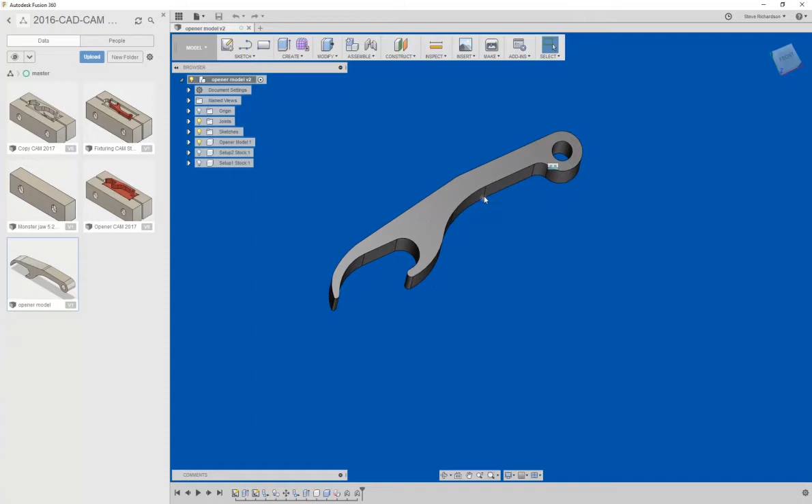The main point is that this inner radius can be made with a 1/4 inch end mill, and it's not a pure slot - it's a little bit bigger than a 1/4 inch. But there are a couple caveats we're going to get into when I show you my CAM. Basically if you do roughing with an adaptive clear, you can't leave too much stock because this isn't very much larger than a 1/4 inch. I'll show you that in a few minutes.

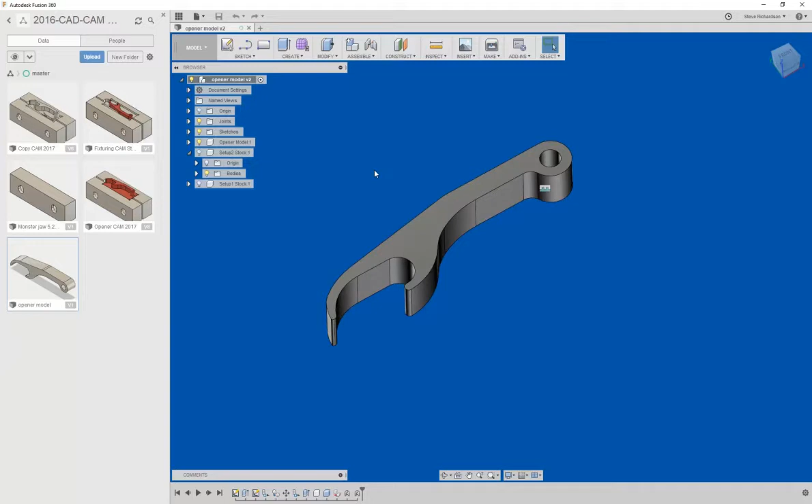This model takes advantage of some of the stuff we talked about in homework one, where I defined the stocks based on the model, rather than just using boxes defined in the CAM. We actually draw out the stock, or model it rather, in the modeling section, and then use those as stock definitions.

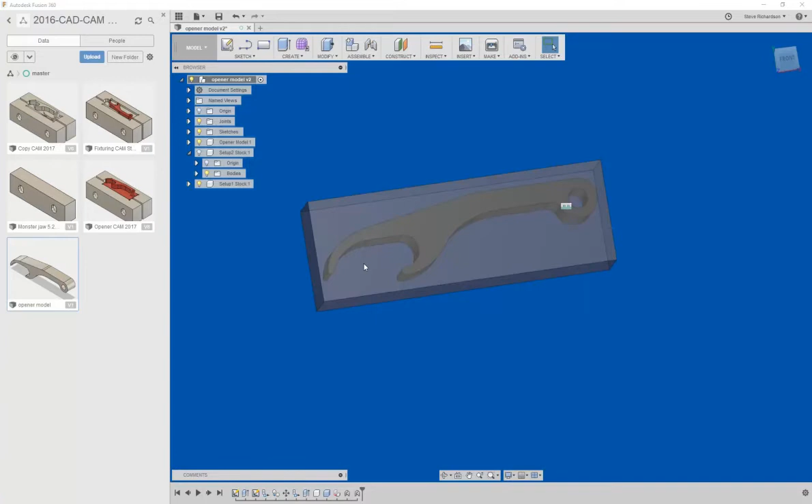For setup one, the stock is just a chunk of aluminum, a rectangle or box. That was easy to define, and I've got that predefined in this model for you so you don't have to go through that exercise. The opener is embedded inside the block, basically biased towards the top. This section at the bottom, this margin, is basically what's going to be held by the soft jaws.

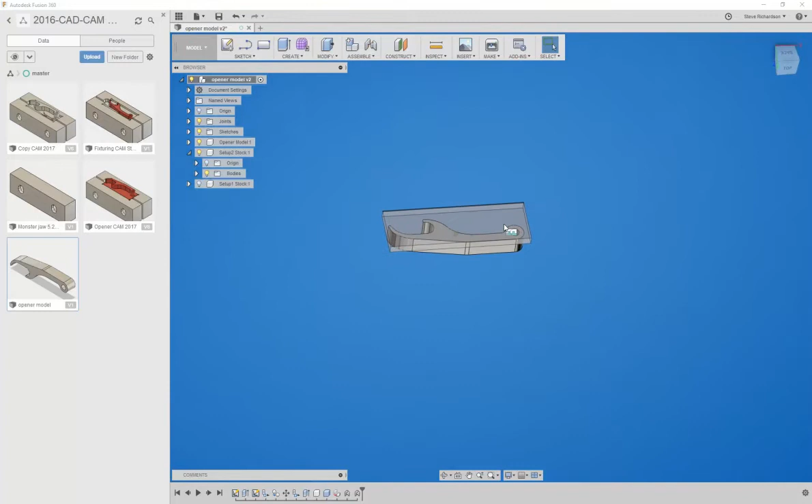When we flip the part over - this is really the one that's not possible to model just using the basic stock definitions in CAM - this is basically the bottle opener flipped over with that extra material represented on the back. This is exactly what it will look like as we go into setup 2 after we've taken it out of the vise from setup 1.

It's a little bit annoying to have to manage these two copies basically of the model, and you'll see that as we get into the CAM a little bit. It's a little bit frustrating. There's probably a better way to do it, but this is the way I've found so far that works.

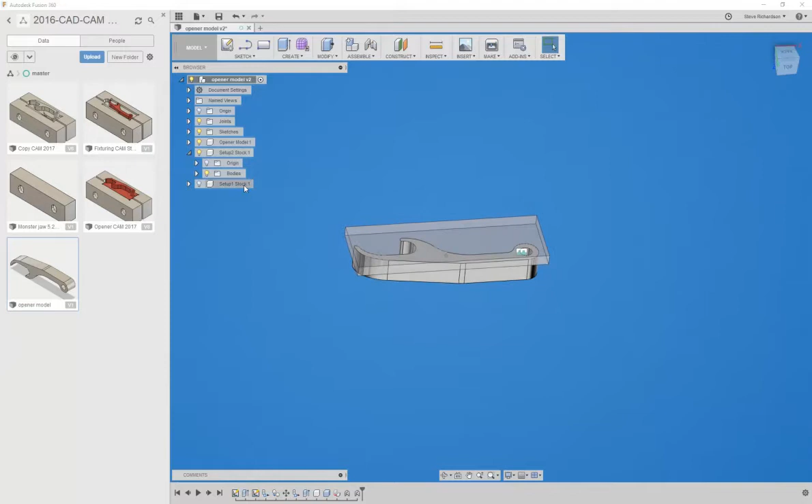So you could open this up and take a look at it, but this model is linked into the file that we use for CAM. You don't really need to work directly with the model itself, so I'm going to close that out for now and not save any of the changes I just made.

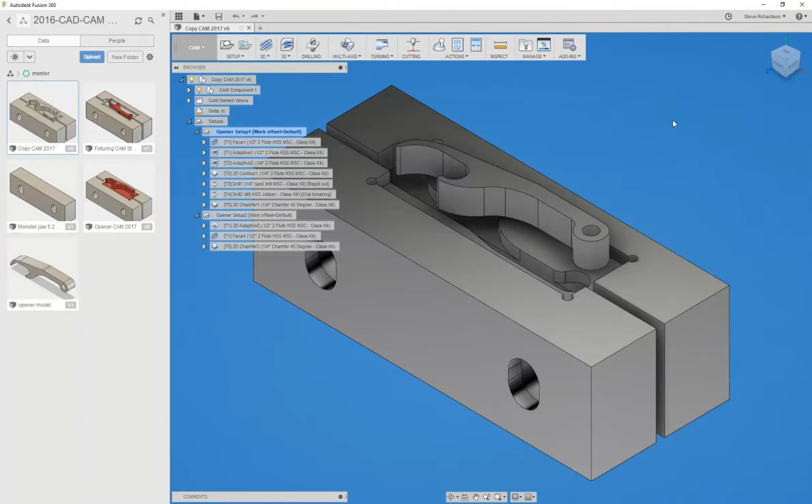So like I said before, I copied over that file that I provided into a secondary file, and this is the file I'm actually using to do all of my CAM work. You can see I've already got this all completed here. This is actually the CAM that was used for the in-class demo I did Monday night. The first thing to take a look at - we're in CAM mode, obviously.

It's very important to open up the model where this component is defined, and this is something you're going to have to do constantly as you work on this, going between setup 1 and setup 2 - enabling and disabling the two different models, because it's basically just two copies of that opener model imported into it, and flipping them on and off is necessary.

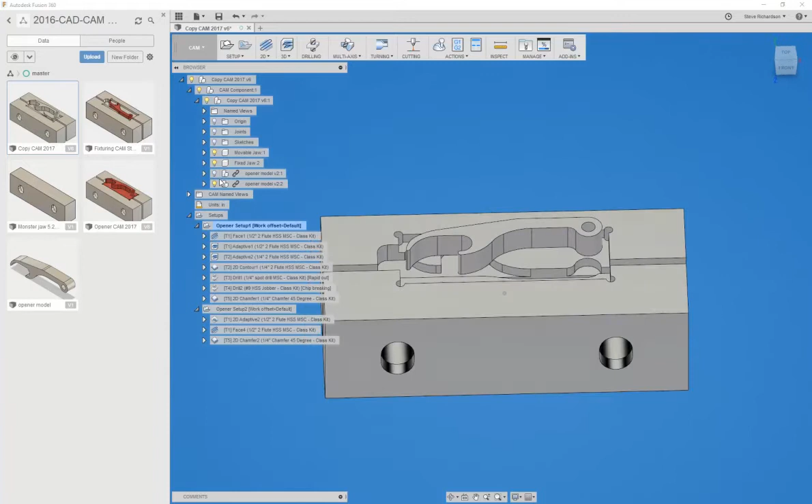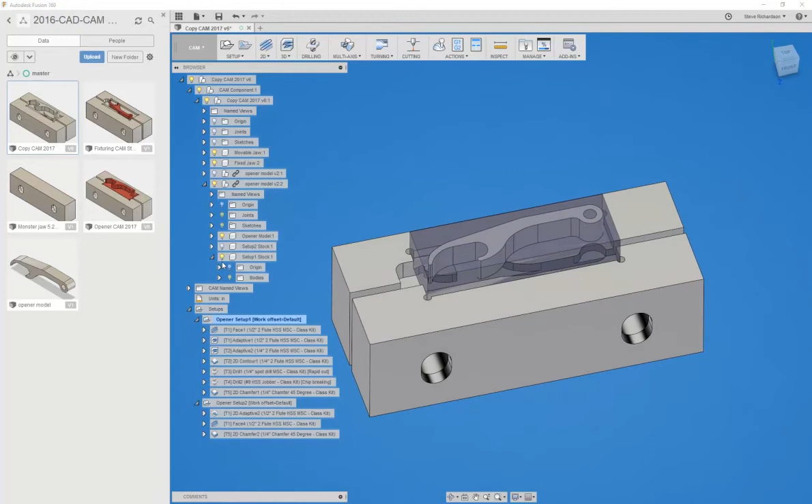You can even expand these further and turn on the definitions for the stock within each one. One thing to note - it's showing up transparent here. I actually modified my opener model from the distributed version, and all I did was turn on opacity to 50% on the stock model for each one. It makes it a little easier to see in certain cases, but we don't necessarily have to have that turned on.

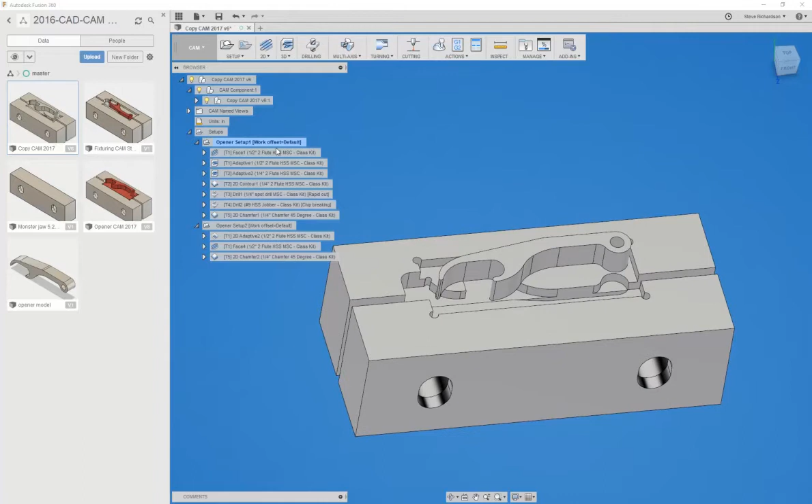So what I want to do is just show you, as you import this thing, the way I distributed it, the setups were all defined. There was a setup 1 that was defined and a setup 2 that was defined. Your job from that point was basically just to program in the operations.

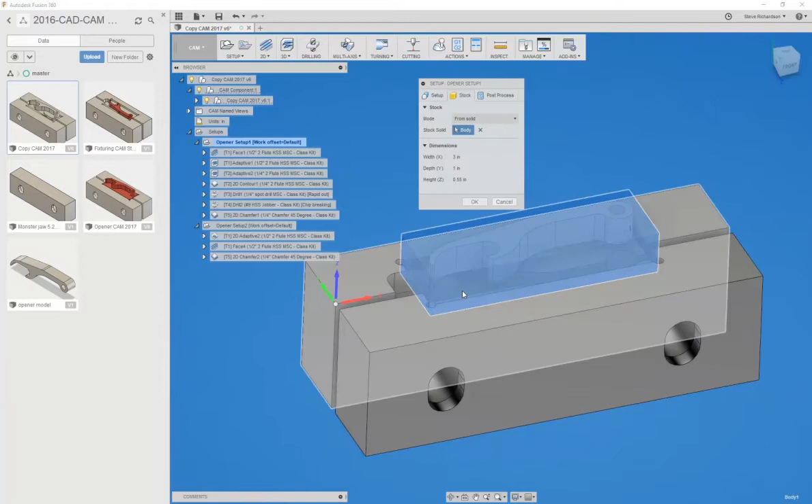But I wanted to give you a little background on how those setups are done. For setup 1, obviously we're starting off with that chunk of aluminum. That stock is defined as a body, and that body was defined in the CAD, and it was the upright version of the model, or the initial copy of the model with the part in this orientation, and it was just pointing at the stock definition that was the box in that copy of the model. It's a little bit confusing, I know.

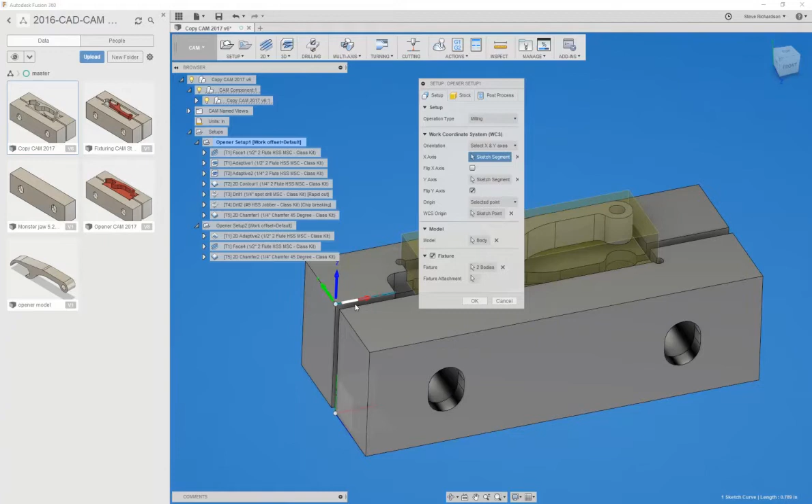The work coordinate system for both setup 1 and setup 2 is this corner. This rear jaw here is the fixed jaw in the vise, and for both of these we're using this corner. So we're going to touch off on this face, and we're going to touch off, it's a little hard to see it here, we're going to touch off on that face, and then we're going to touch off on the top of that. The nice thing is that both setups use the same work coordinate system origin, so we don't have to retouch off when we flip the part over. That's one of the benefits of this work holding setup that I defined, just to make it a little quicker to run the part in class.

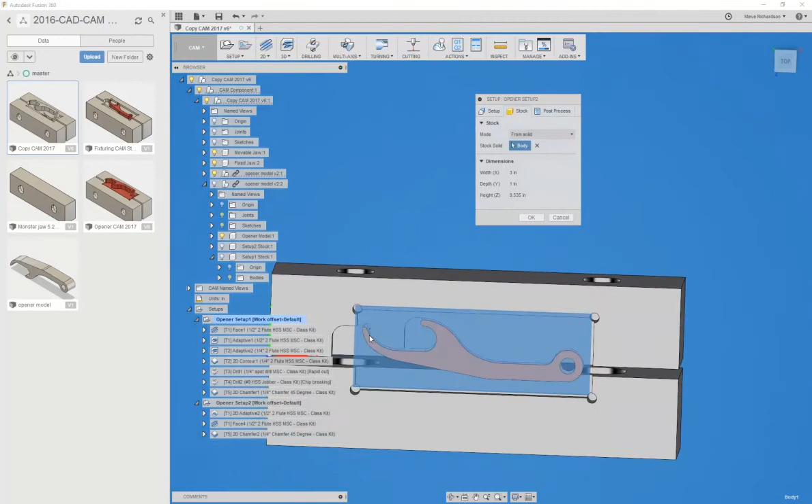So that was setup 1. Setup 2 is defined also in this model. This is where we get into the point where we need to flip these things around. This uses the flipped version of the part, and it uses the setup 2 stock that was defined. So this is exactly what it will look like. It'll be held in the soft jaws, and we'll have this remaining material on the top that we're getting rid of. That's really the whole point of setup 2 in this particular job.

Oh yeah, I wanted to also show the work coordinate system for setup 2. Again, it's that same point.

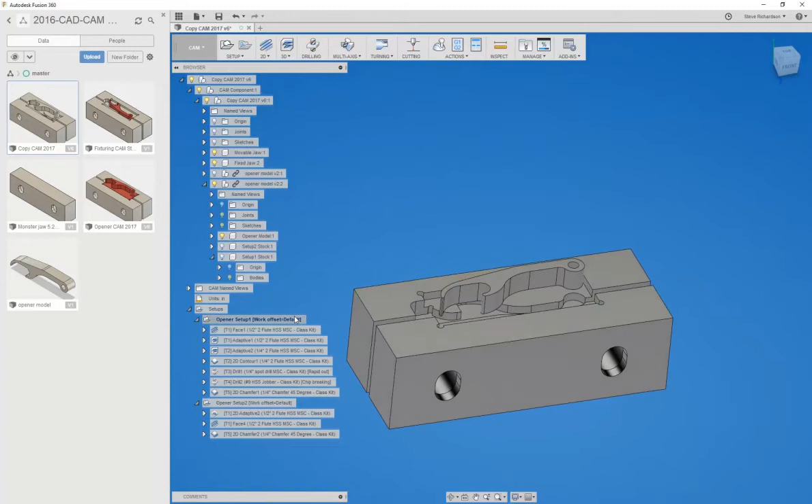Before we get into the actual operations that I have programmed here, I wanted to show the tools that I have set up. This was the homework, I think, in the second week, just asking you to set these tools up. Should have 5 tools. They need to be numbered in this order because I really want everyone going through this in the same way so that I can more easily sanity check people. There's not necessarily any reason you couldn't number them differently, but for the sake of consistency in the class, I want them all numbered this way.

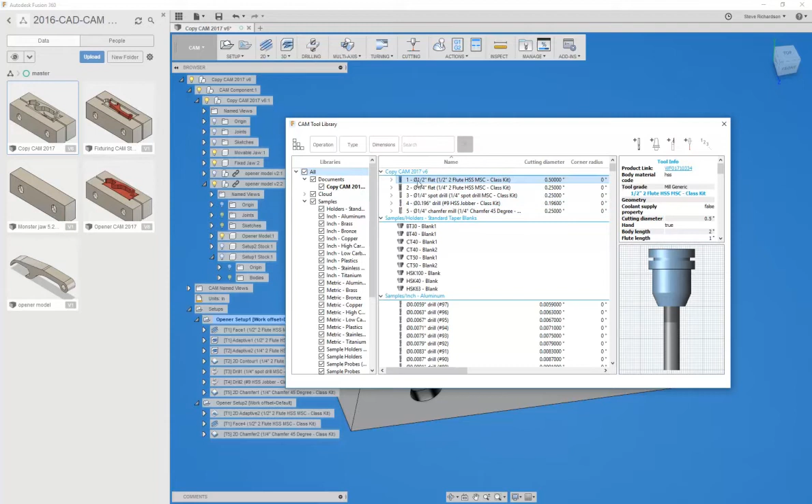So tool 1 is that 1/2-inch flat end mill. I actually defined mine with a bit more detail than you guys necessarily have the info for. This shows where they came from, what the model numbers are. Got the actual flute lengths and shoulder lengths and everything programmed in here. If you really want to match this, you can. I'll probably provide this document shortly.

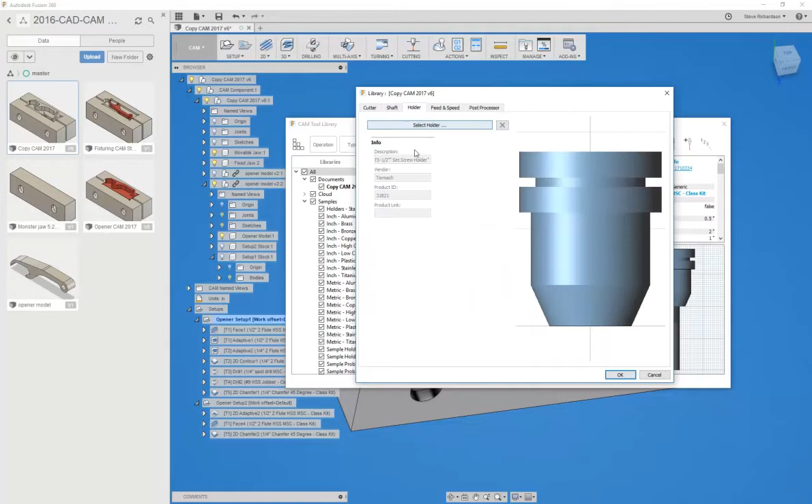I defined the tool holder as a Tormach set screw holder. I did rough in some feeds and speeds. It's a little conservative. I just set in 4 thou per tooth and 4,800 RPM just as a rough starting point. And in the post processor tab, the most important thing is make sure that this was set up as tool 1.

This is a common dialogue you're going to get if you make changes to your library, that it says, hey, all these operations use this tool. Do you want to update them with the settings that are in this tool definition? This gets you in trouble all the time because it defaults to yes. You really don't want to make any changes here, so generally you want to say no. If you have speeds and feeds programmed that are different for each of the operations that use this tool, it will basically go and blow those away and replace them with what's in the tool library. That's a trap that I have gotten into before, and I see a lot of people accidentally just say yes right through that. So you're going to want to say no to that.

Just quickly go through the rest of the tools here. Tool 2 is a 1/4-inch end mill. This also has the MSC info where the tools come from, the shaft diameters, the lengths, all that stuff. This tool happens to have a larger shank than the actual cutter.

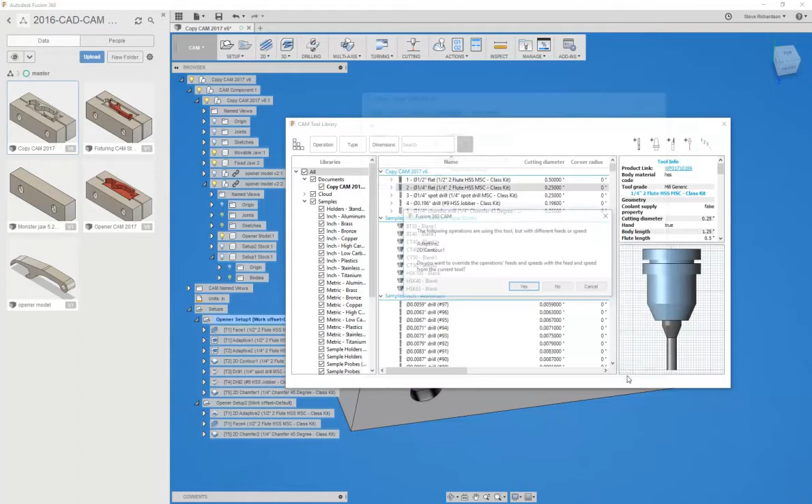Just happens to be the tool that I purchased for the class, so you can actually match that definition if you want. It actually required using the more detailed tool editor to get that set up. This is also in a set screw holder. I just did an initial 2 thou per tooth, 5,000 RPM, just as a rough starting point. And the post-processor page, you've got to get all these numbers set up for tool 2. Again, we don't really want to change that, just cancel out of it. It's fine, I'm not really editing here.

Tool 3 is that 1/4-inch spot drill, high-speed steel. This is all the info, again, from MSC where the tool came from, cutter diameters. It's going to be held in a TTS ER20 collet holder. Feeds and speeds - it's really the vertical feed rates that matter in this one. I just have it roughed in at 3,000 and 3,500 RPM.

Post-processor, make sure it's set up for tool 3. Tool 4 is the number 9 drill. There's the info for that. The holder - we have only one drill chuck set up in the default Tormach tool library. We actually have some different chucks at MakeIt Labs, but it's fine to define it as this for now. Speed and feed, the vertical is what matters again for drilling. I've got it set for 4 thou feed per revolution. Post-processor, again, make sure this is set up as tool 4.

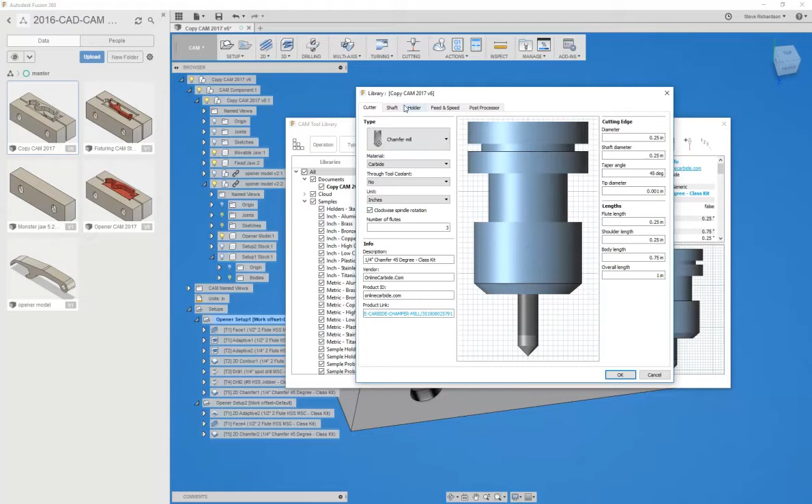The 5th tool is the 1/4-inch chamfer. The only real trick on this one is that if you define it as a chamfer mill, it needs to have a diameter at the tip. This one I think I bought for the class actually does have a slight flat on the tip, so I just define it as 1 thou at the end. Taper angle is 45 degrees, and we're going to hold that in an ER20 collet holder. Speed and feed, I've got it set just under 1 thou per tooth and 5120 RPM max RPM.

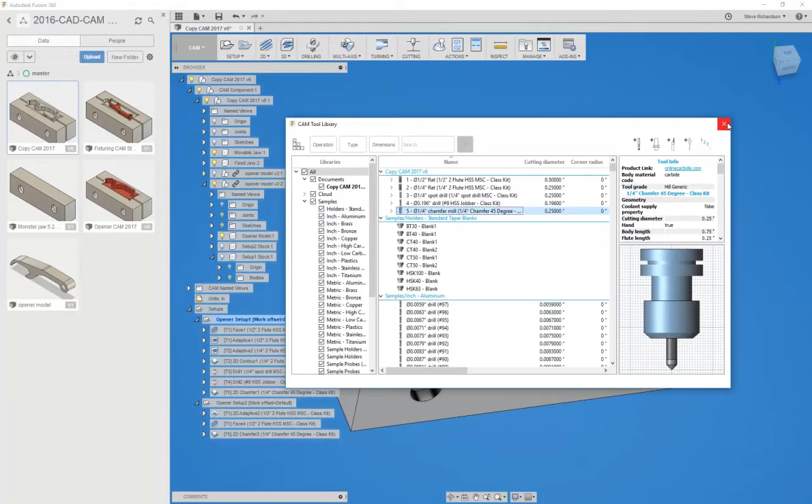Post-processor, just make sure it's set up as tool 5. So you should have your tools basically set up in a similar fashion. It doesn't have to have every last field filled in the exact same way that I did, but they need to be close to that. I'm going to cancel out here.

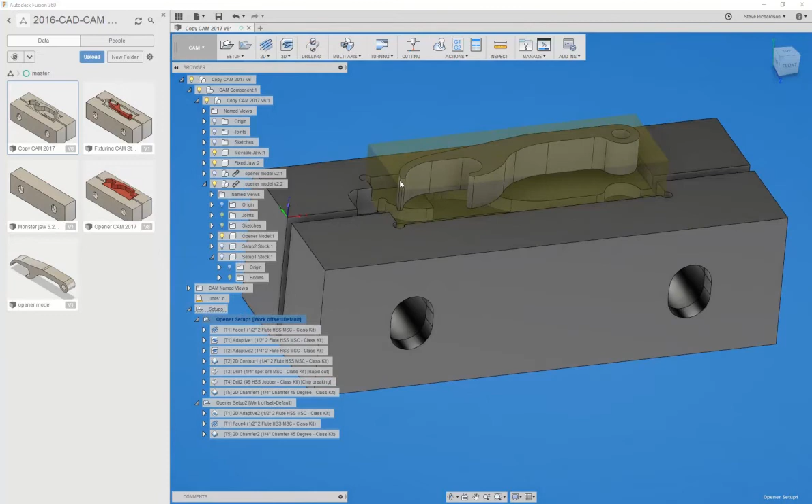And we're going to go through the operations kind of as I decided to program them. Initially, we need to face off the top of this material. So if you highlight the setup, you can see what the stock looks like. Just to refresh your memory, we're working from the full chunk of aluminum. First thing I'm going to do is face off the top here.

And we can edit this operation and see - so we're going to face that off using the 1/2-inch flat end mill, just using roughed-in feeds and speeds for now. This is actually what I ran it as in class, but I will try to do another video where I show going through the speeds and feeds thinking, basically, and how to look at these in a little bit more detail using HSM Advisor or other techniques, but these numbers work.

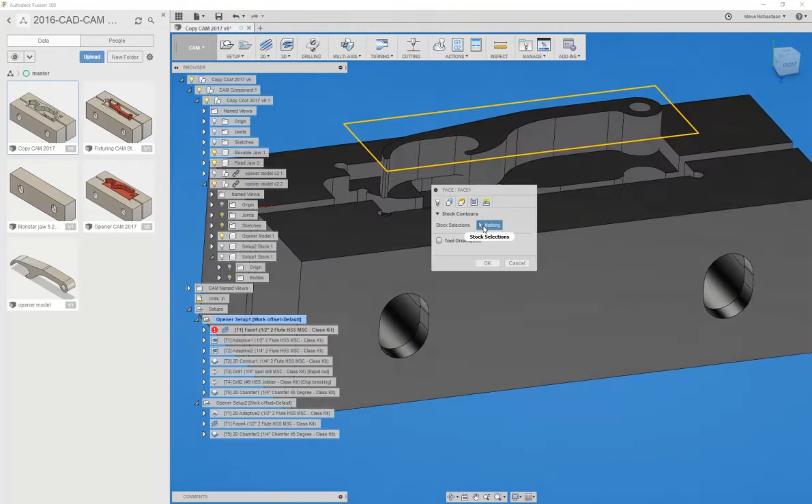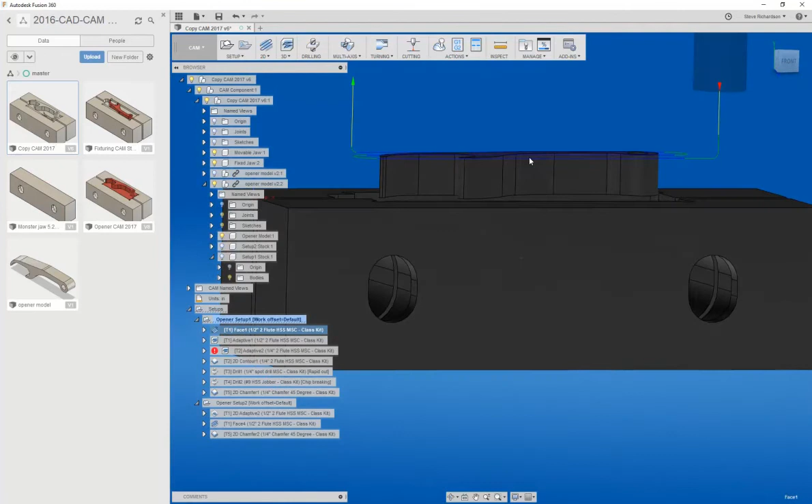The geometry, I'm actually just using stock contours with nothing selected, basically saying, hey, clear off all that material down to the top of the part. The heights pretty much work by default. Passes and linking, you don't need to make too many changes in there. And it generates a tool path that looks like that.

Next, this is kind of the first and really the bulk of the machining that gets done on this entire part - roughing to clear away most of the material that leaves most of the bottle opener, and then we just have to do some cleanup after that. So this is an adaptive, using again the 1/2-inch, using speeds and feeds kind of as you see down here. Again, I'll go through that in detail in a different video.

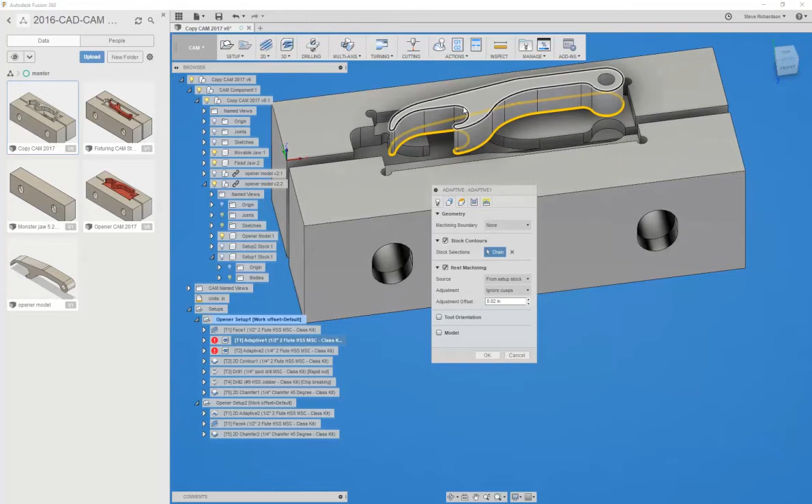The geometry, I have selected the bottom of the model, so that's automatically going to set things like the depth of that cut without you having to go through and explicitly do it. You can also choose the top geometry since it's the same shape, but then you have to go through and separately tell it the bottom height, where that is. But if you choose the bottom, it tends to do the right thing.

In the passes tab, this is where we have to pay attention to a couple of different things here. So, first of all, optimal load is a critical setting. It's basically the optimal width of cut that it's going to use for an adaptive clearing. It's trying to calculate it so that it's always keeping that much material in the cutter. I'm doing 75 thou in this case. That's kind of getting towards the capacity of the machine.

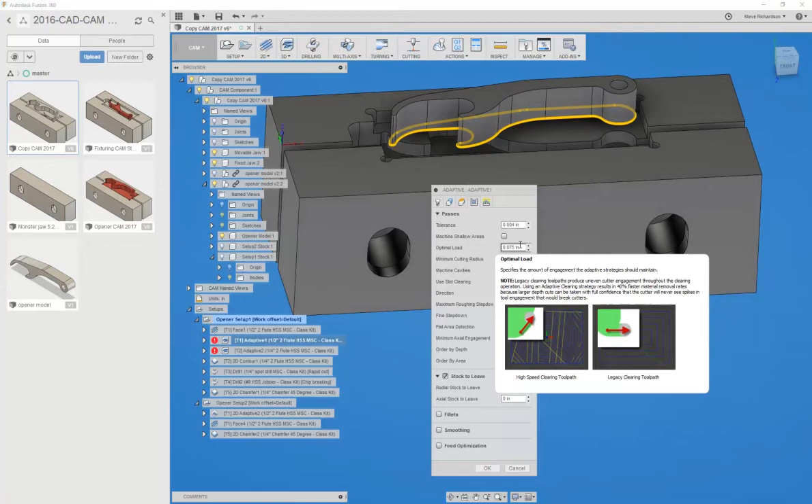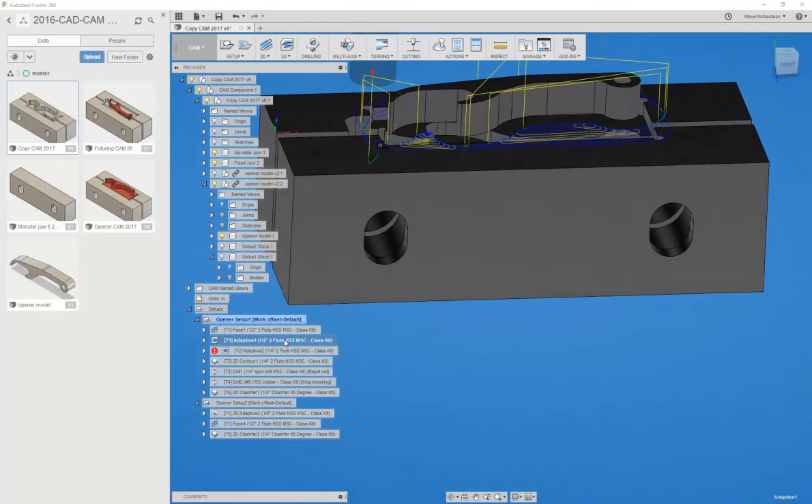When you heard the cut run, you could tell that it was actually working fairly hard. We're cutting at 38 inches per minute, and we're taking 75 thou, and it was making all those concentric passes to remove that material. For the Tormach machine, it's not as aggressive as you can go, but it's relatively aggressive. You could move material a little bit faster if we had a 3-flute end mill that was made for aluminum, but for the 2-flute that we've got, this is a reasonably aggressive cut.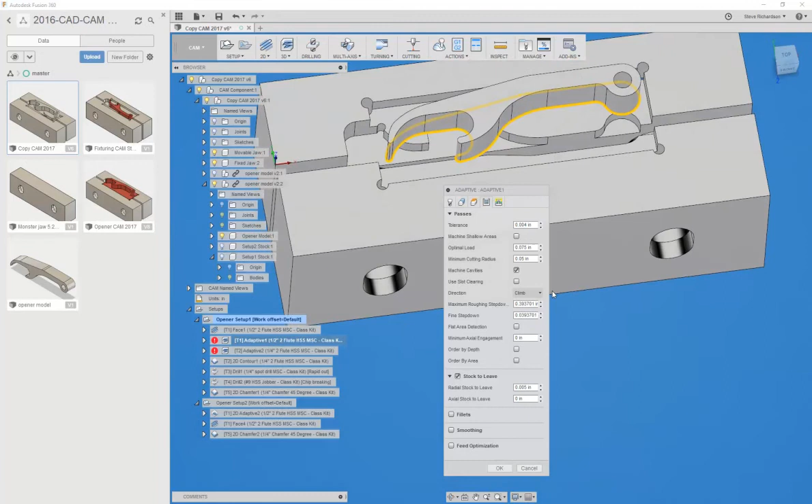Now, I mentioned earlier that there is a situation we get into in sort of the armpit of this opener, if you will, because if we leave too much material, the 1/4-inch end mill isn't going to be able to get in there when we go back and do the next step. So there's a magic number you kind of have to use for this part. It's not something that's going to apply to every single project. It's just a number that happens to work for this design.

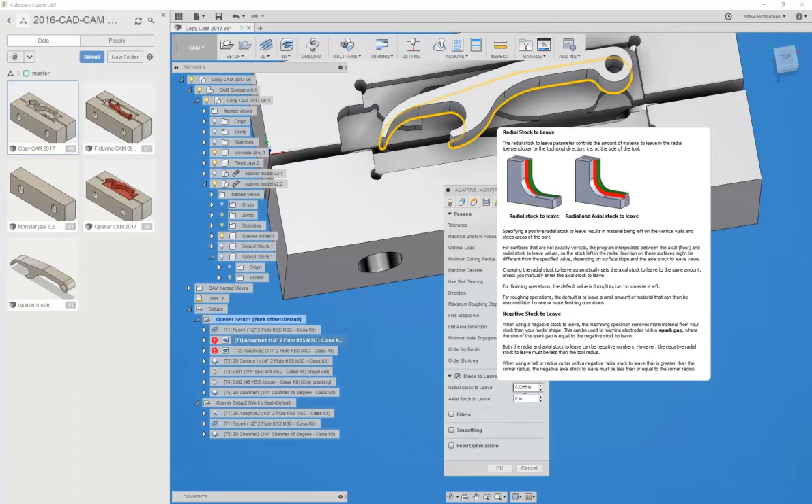Because we're doing this adaptive clearing as a roughing, leave some stock because we're going to go back and clean it up later with a contour. The default value, I think, is 20 thou, and that's not going to work properly. You need to dial that down to 5 thou for a reason that I'll show you when we get to the next adaptive clearing, when we drop down to the 1/4-inch. So that's that operation. I'm just going to regenerate this so that we can see what this one goes back and does.

We got the bulk of the material away with that 1/2-inch adaptive. We're going to go back in with the 1/4-inch end mill and then use rest machining so that we don't cut air. And we're going to clean up the remaining stuff that 1/2-inch end mill couldn't get. Oops. So we're now using our second tool. We did that facing and that first adaptive, both using the 1/2-inch. Now we're dropping down to our 1/4-inch end mill.

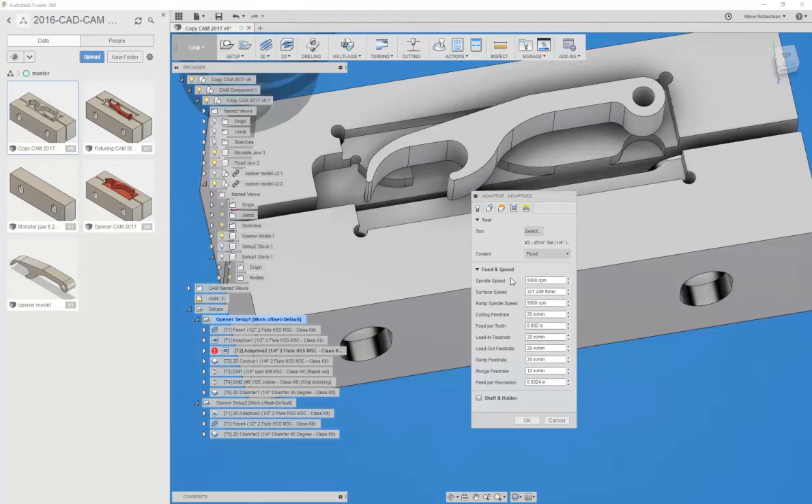Speeds and feeds, just using the roughed in numbers, so 2 thou per tooth, 5,000 RPM. I run it a little bit higher because it's a smaller cutter. The machine can push it okay. The geometry, same geometry that we had selected for that first one. But we have rest machining enabled for this operation, and the source is set to from previous operation. So it's going to look back at that last operation that got run with the 1/2-inch and figure out what material got removed from that, and then only calculate tool paths to remove the material that operation couldn't clear away to reach the geometry that we told it to.

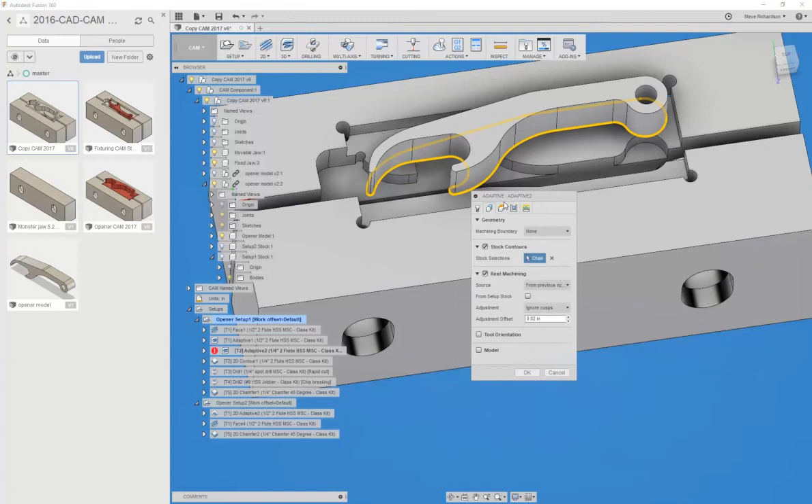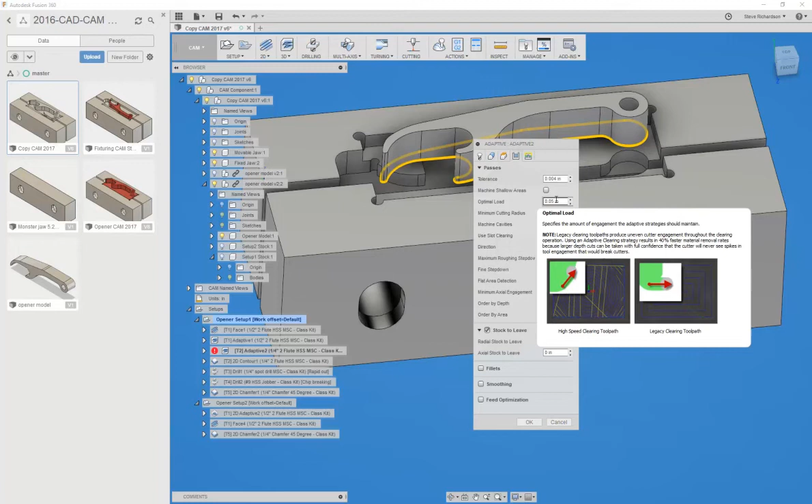Heights by default are generally correct if you select that geometry. But again, there's a couple critical parameters in here. Optimal load, I have set down to 50 thou, and that's a reasonable number that I determined to work well with that cutter. That initially was determined with the help of HSM Advisor, and then tested out on the machine until I found a cut that was cutting happily. So it does take a little bit of iteration, but you'll come to have your own kind of gut feel for this after you've done a few things and tested out the particular tools that you purchase.

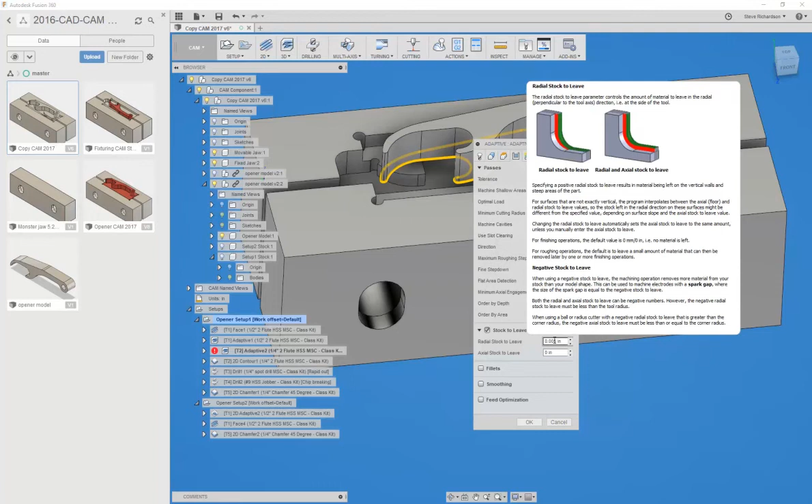So 50 thou optimal load and stock to leave. Again, we have to dial this down to 5 thou just to get this part to work properly. So if we left stock to leave at the default of 20 thou, even the 1/4-inch end mill wouldn't be able to come in here and do an adaptive clear.

You see what's really going on? There are all these little tiny paths for it to get in there and clear out this material. If we had left 20 thou of material stock to leave on these two adaptives, there would be a large amount of material still left over in this corner. And for the next operation, when the contour comes in there, it's just going to happily come around the corner and then plow into this huge mass of material that hadn't been removed in the roughing steps.

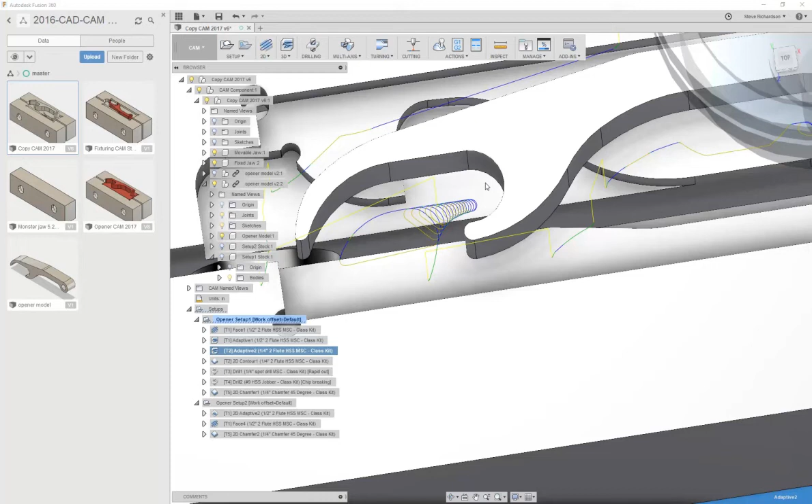And it doesn't know any better or care any better, so that's an opportunity where you can easily break end mills. So it's something to pay attention to on your own projects going forward when you have a feature like this, just to make sure that you're generating toolpaths that clear away the material during the roughing phase, so that when you go back and do a finish pass later on, you're not plowing into a bunch of extra material. Simulation can help you see that problem before it happens, but I have broken more than one end mill because of that kind of thing before.

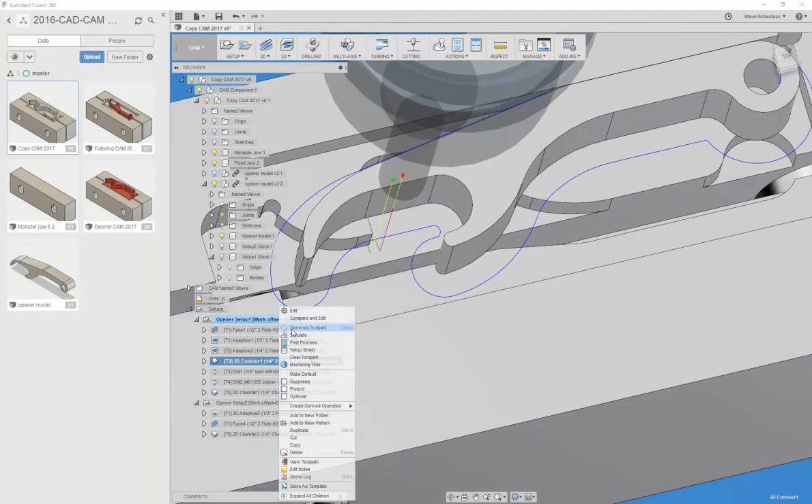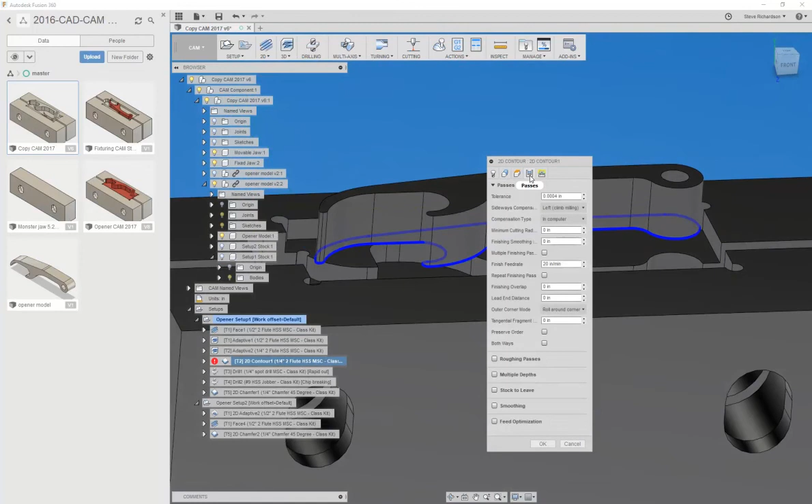So the next operation, again using that same 1/4 inch end mill, is a contouring operation. This is really our finish pass to give the whole outer edge of this part a nice finish. I'll quickly take a look at that. Again, it's using the 1/4 inch, 5,000 RPM, 2 thou per tooth. Geometry is the same. We don't need to use rest or anything like that in this case. The heights by default are correct. And make sure there's no stock to leave, because this is our finishing pass. And that's about it.

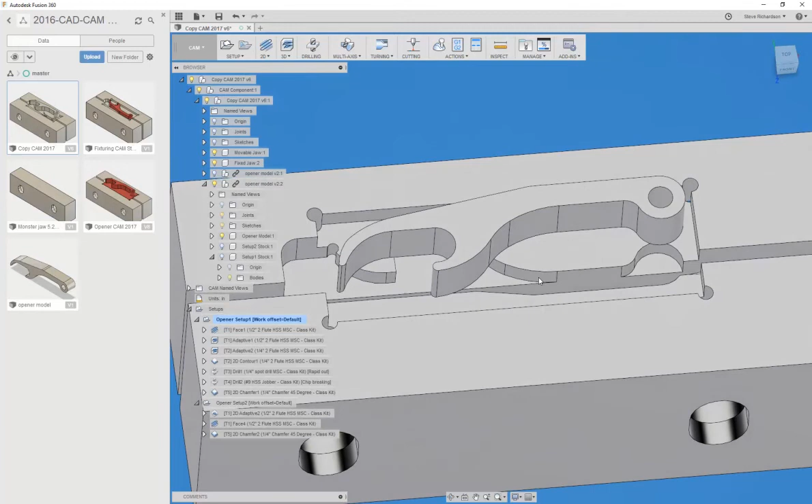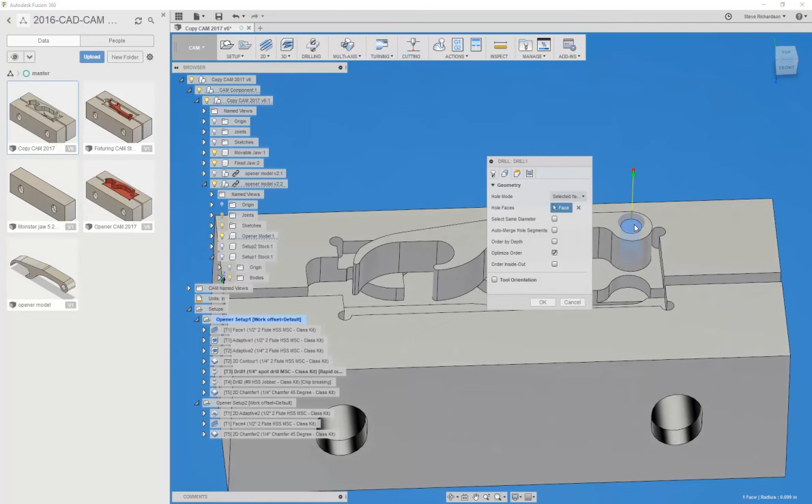So that basically machines out most of this bottle opener, but we need to also drill out the hole, and then we're going to chamfer it. So the next operation we're going to do here is a spot drilling. This uses now tool number 3, which is our 90-degree spot drill, 3,500 RPM, plunging at 12 inches per minute. The geometry is really just picking that hole, or this face in this case. That's how I chose that geometry. And it'll figure out that that's the center of the hole that you want to use.

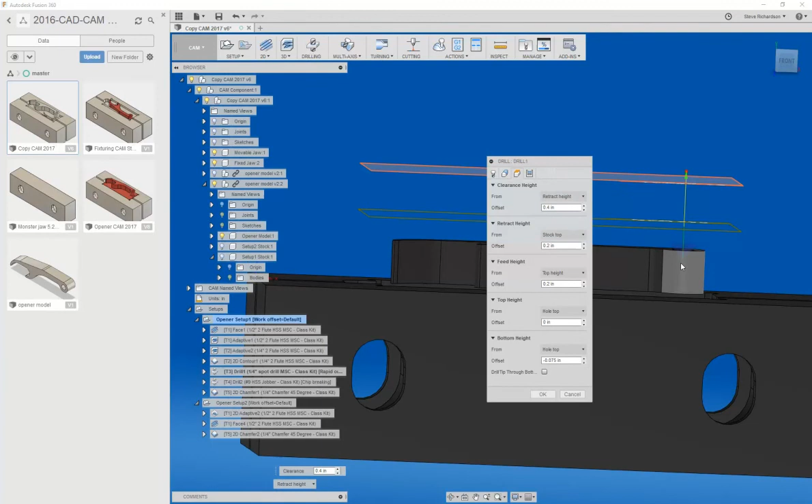Now the heights I actually programmed in this case rather than letting it choose. And this is something that you need to get a feel for over time. The bottom of the hole, I'm not drilling the tip through the bottom. I'm basically just telling it to go 75 thou below the top of that hole, the way I chose the heights here. And you can actually see the cone that it generates, so that's how far that tip is going to protrude in there. All we're trying to do with the spot drilling is give it a little tiny cone so that the follow-up drilling from the drill bit will follow and not wander and skate when it tries to start drilling. So that's a reasonably good number you can use in the future, but feel free to experiment and dial that up and down for different projects.

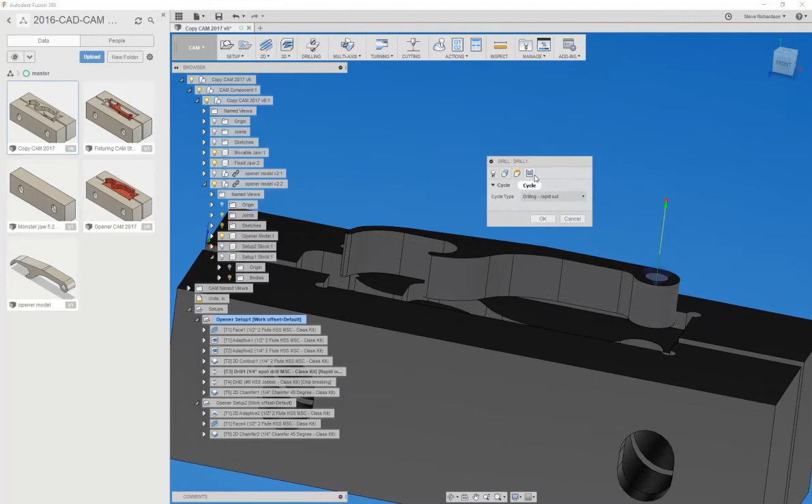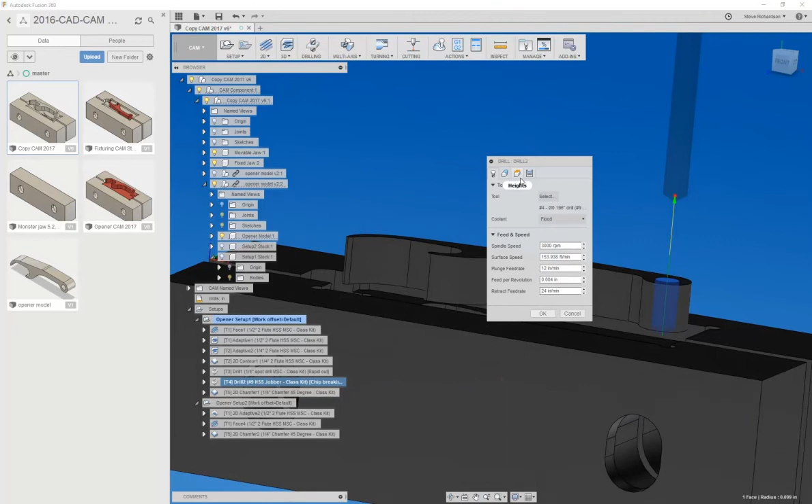And we're using just a rapid out drilling. This is really just going to tap it, and that's the entirety of the operation. It's not like it's drilling through it, so nothing really to worry about there. After we've spotted it, we're going to come in with the actual drill, running this at 3,000 RPM, 12 inches per minute plunge. The geometry is, again, that hole face. And the heights in this case are programmed so the bottom height in particular is to drill the tip through the bottom, and we're going to offset it and go in another 10 thou here.

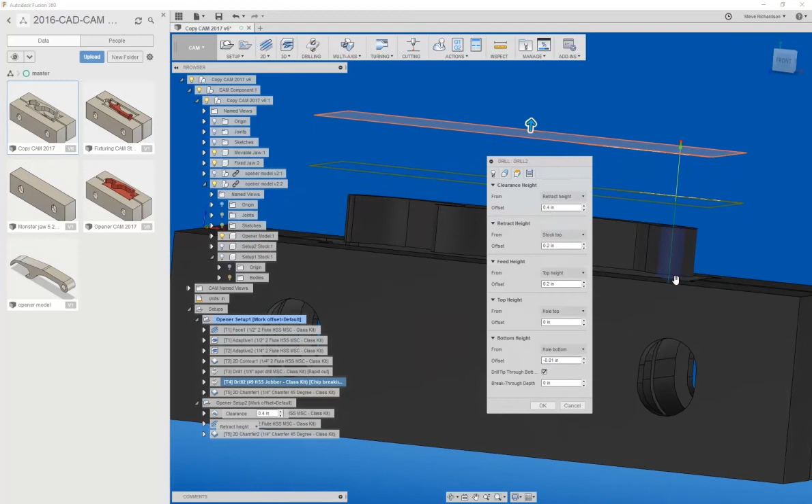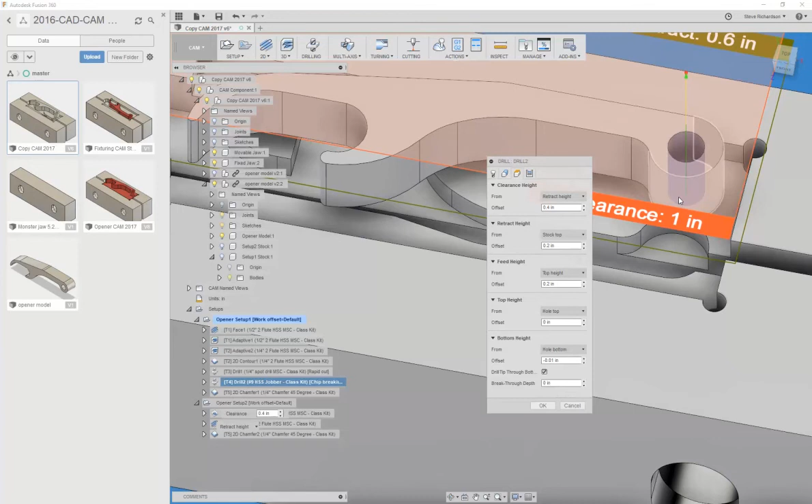It's a little hard to see, but you can see that the point of this is drilling through the bottom. There's that extra material that's hanging out that we're holding onto it by, and it's going to drill into that a little bit and poke the tip all the way through. You have to worry about this depending on your work holding. In some cases, you might be accidentally drilling through your parallels or something like that. You just got to pay attention to that kind of thing when you're programming it and thinking about your work holding. But in this case, this will work.

And I'm doing a chip breaking partial retract. So this will stop and very slightly bring the spindle up every so often. There are programmable parameters in here. I'm using the defaults. They tend to work okay. This will just help break the chips. This isn't a particularly deep hole, but it pays to be a little bit conservative. Breaking drill bits in your part is no fun.

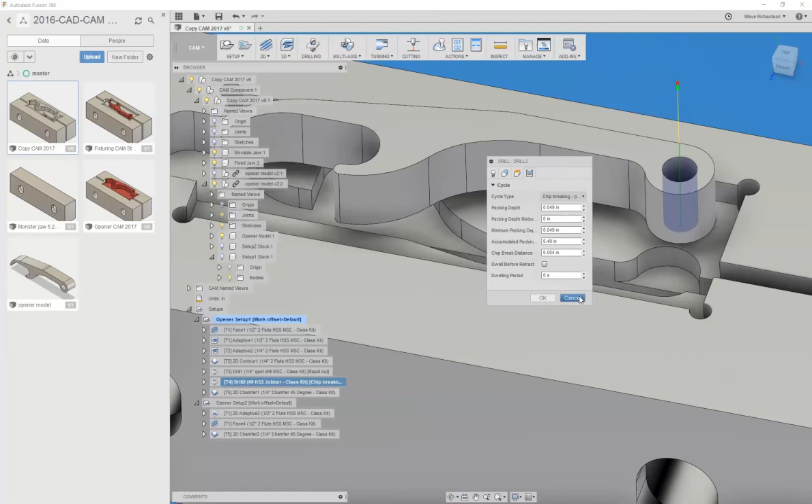So then our last operation here, for setup 1 anyway, is to do the chamfer. And we're using tool 5 for that, which is the 1/4 inch 45-degree chamfer mill. Running this at the max RPM, and we're cutting at 15 inches a minute. It's basically just under a thou per tooth.

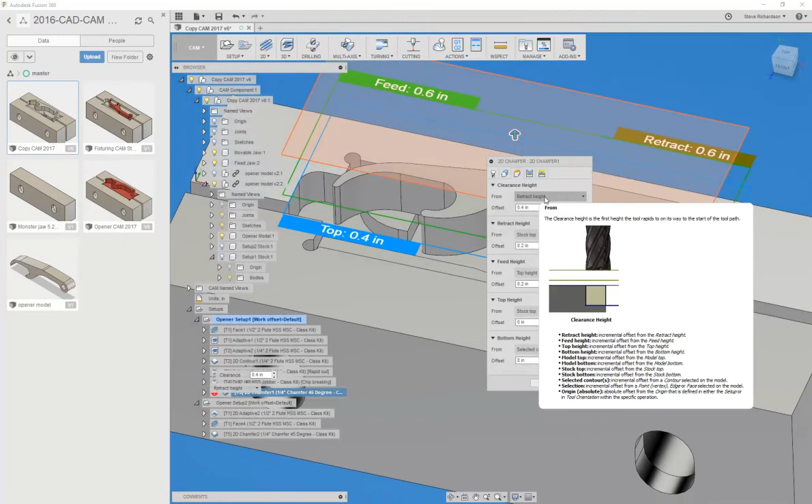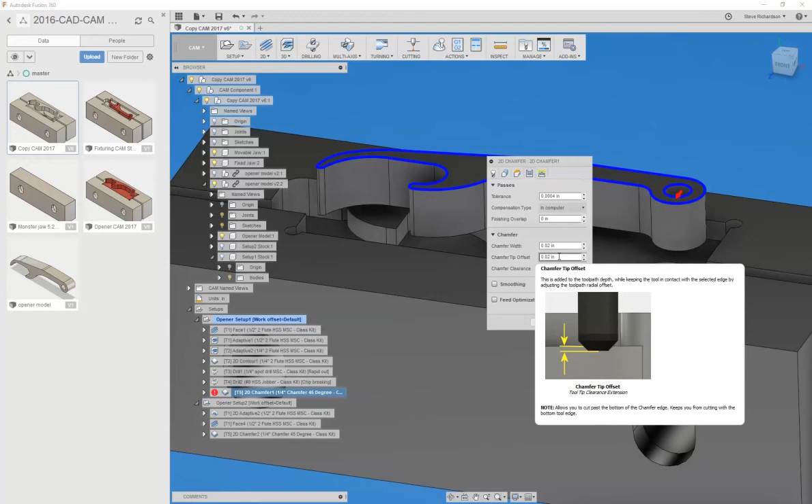The geometry, I've selected both the outer contour of the part plus also the hole. Heights, you don't necessarily program the heights explicitly. The thing that actually will change how aggressive that chamfer is are these two parameters, the chamfer width and the chamfer tip offset. By default, I think this is what they come up as, 20 thou, and that makes a fairly nice broken edge. But if you look at these, they describe exactly what those two numbers mean in terms of the geometry. It's just controlling where it's putting the chamfer tool along the edges that you've defined in the geometry setting.

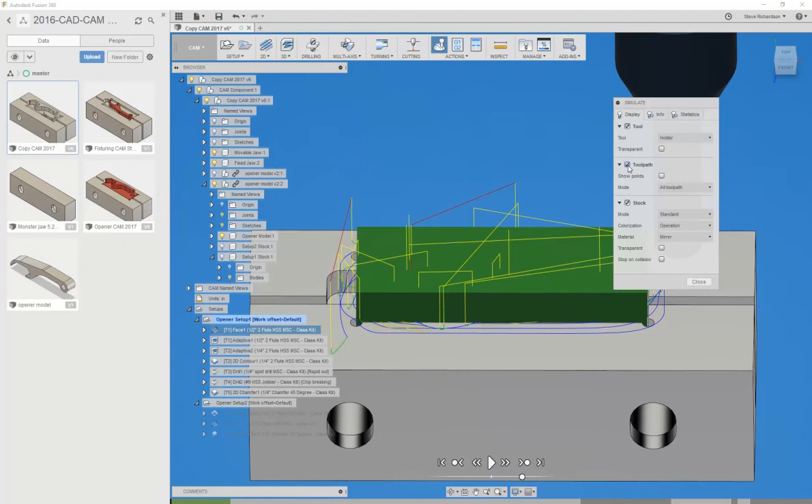So we've got setup 1 basically defined here, and it's nice to be able to run that simulator and see what we're going to do. So when I run the sim, I always turn the stock on because that's really kind of what we care about. I'm going to turn the toolpath off just for clarity in this case. The controls down at the bottom, obviously you've got your play; if we just hit play, we can see what it's doing kind of in real time. You can speed that up and slow it down with this, and you can actually make it go backwards, which is kind of bizarre.

But if you've already simulated a particular operation, you can just skip over it with the go to next, and if you want to see what the end result of all of the operations are, you can just click to the end and see what you're left with, and that's another useful thing to do. But we can see that this is now doing the adaptive clearing. It just did the facing while I was talking. Make this go a little bit faster here.

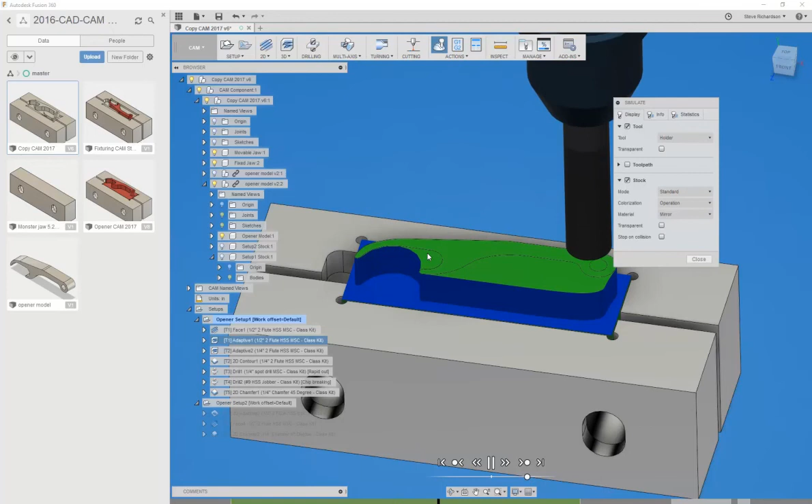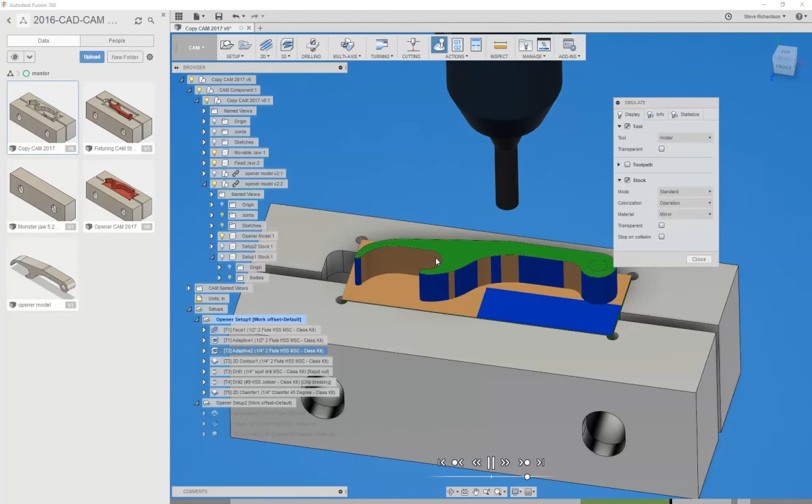So you can see it's leaving all this material in here because it can't reach it, but it can clean this up, and it's coming back and it's doing these moves where it actually picks up the tool and drops it back down because it's always trying to do climb milling. It doesn't want to go back and forth because we told it to just do climb. So you saw that 1/4 making all those really, really small motions, but you can see that it cleared out almost all the material in there so that this contouring operation was able to get in there and not encounter a huge chunk. You saw the drilling, the spotting, and now this is the chamfer operation.

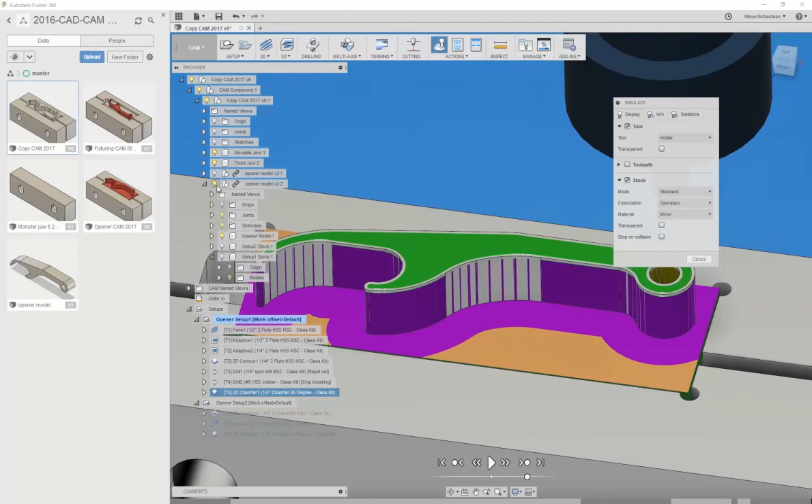Now I didn't model the chamfers in the CAD. I didn't really see the reason to. I'm just doing these as edge breaks really. But when you simulate it, you get into this weird situation where you're like, well, I saw the chamfer tool run through it, but why is there all this gray crap? And the reason is that it's fighting basically between showing you the stock that you told it to show you and showing the model. So if you shut the model off temporarily when you're running the simulator, you can actually just see the stock just like you would on the machine.

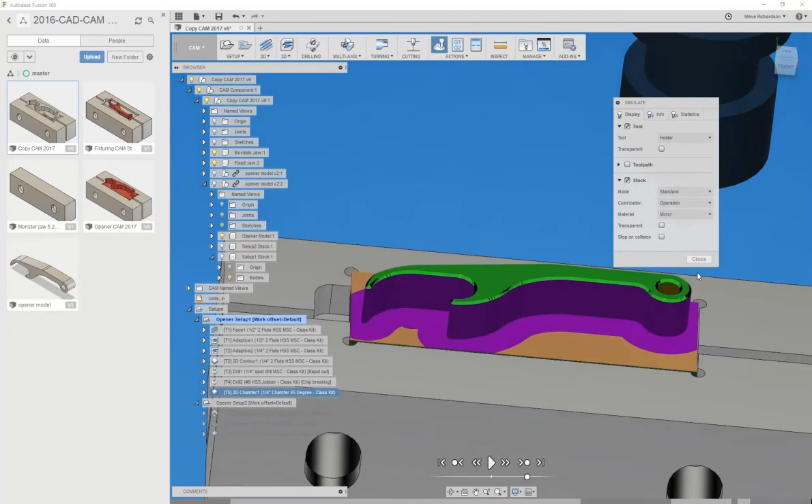And you can see that there's now a chamfer in there. It's a little faceted because it's not running at the highest level of accuracy, but that's what we get left with at the end of setup 1, and that's exactly what we're looking for. So now let's take a look at setup 2, and we'll switch to the second setup here. This is just like in the CAD section where when you are switching between components, you need to select using that little radio button. You need to do the same thing here in CAM.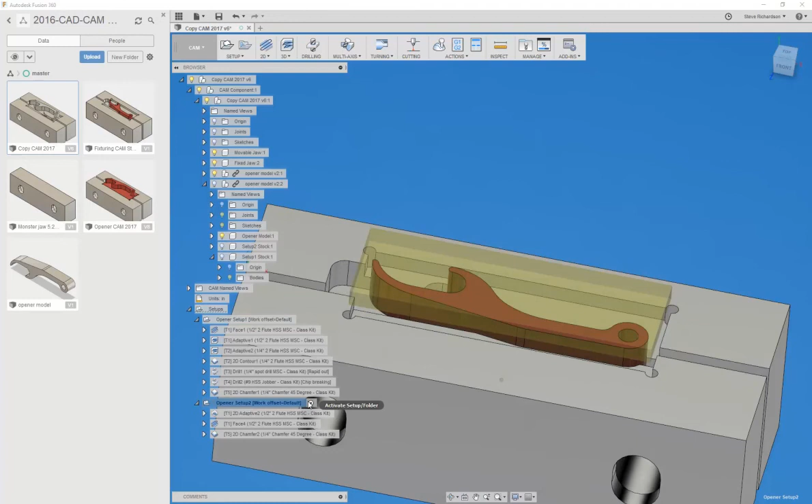So you see we flipped the part over. If I've got that setup highlighted, it shows you the stock definition in yellow. If I shut the actual model off, you can see that the whole thing is modeled down here in yellow, because this was all something we defined in CAM and pointed CAM to and said, use that as your stock definition.

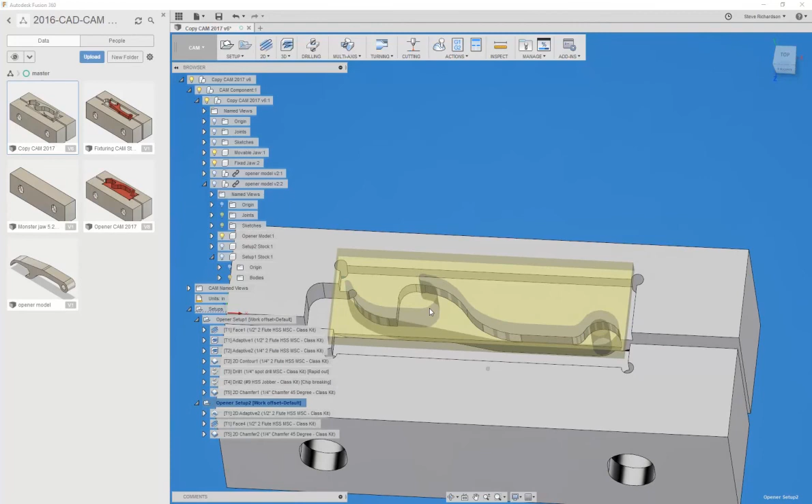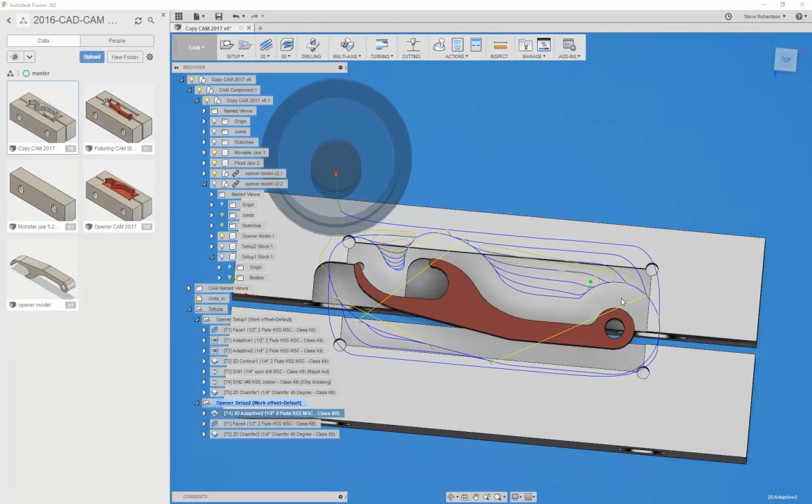So we're not doing a whole lot in setup 2, where basically the whole point is to get rid of all of this material. So the first thing we're going to do, I chose to do an adaptive clearing to kind of get rid of all that overhanging material, because you can get into a situation where if you just face that off, as it gets closer and closer to the part, you're getting it down to basically tinfoil. So after considering a bunch of different potential ways to do this, I decided to do an adaptive clear, which basically gets rid of most of that overhanging material, and then we go back in and face it.

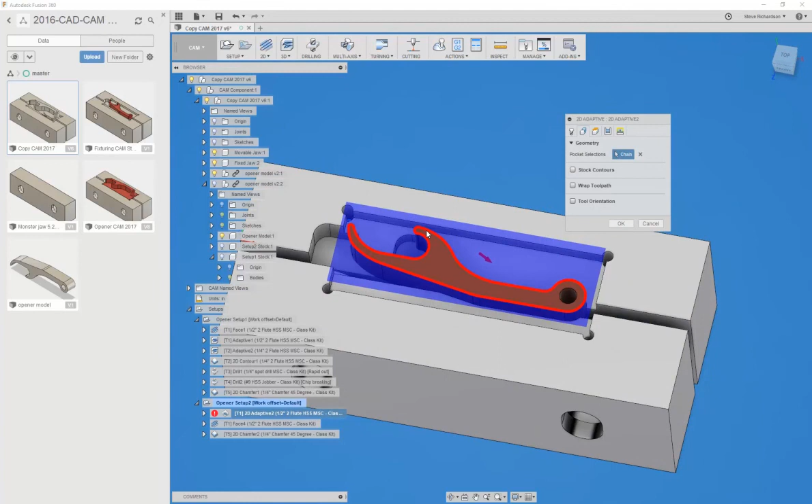So we're going to use our 1/2 inch flat, running with the same kind of cutting parameters that we were using earlier. You could probably make this a little bit more aggressive because we're taking a much lighter cut in terms of depth of cut, but just for the sake of clarity, I use the same speed and feed parameters. The geometry, I have a chain selected here, which is just the outside, and it knows that I'm trying to remove all the rest of that stock.

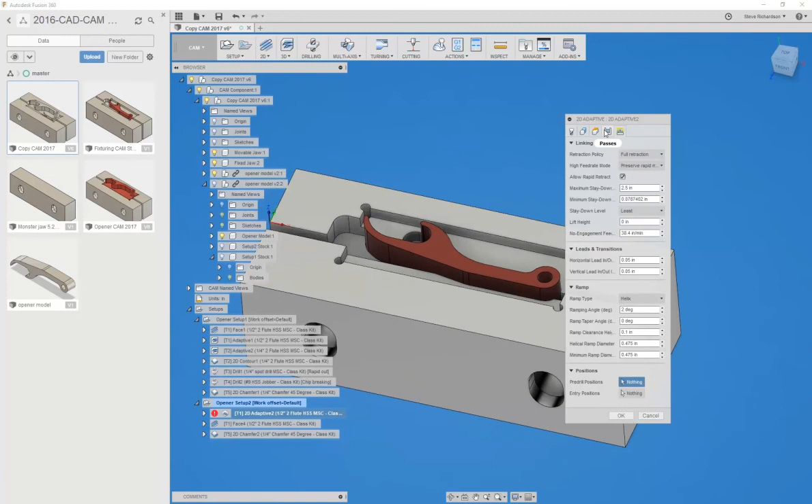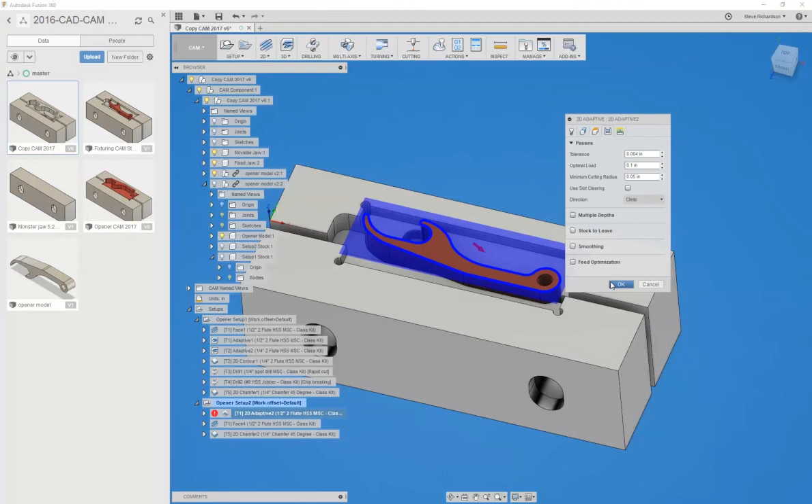Heights are pretty much just default. Nothing particularly special set under the passes, but the optimal load actually is one thing to pay attention to. I did take a slightly more aggressive cut, actually, now that I think about it, because I think we did 75 thou in the first setup. This is, like I said, a little bit thinner depth of cut. So I upped the optimal load to 100 thou, and it seemed to be perfectly happy with that. So it'll go a little bit faster. And there was no stock to leave, nothing like that. We're just roughing and getting rid of most of this material.

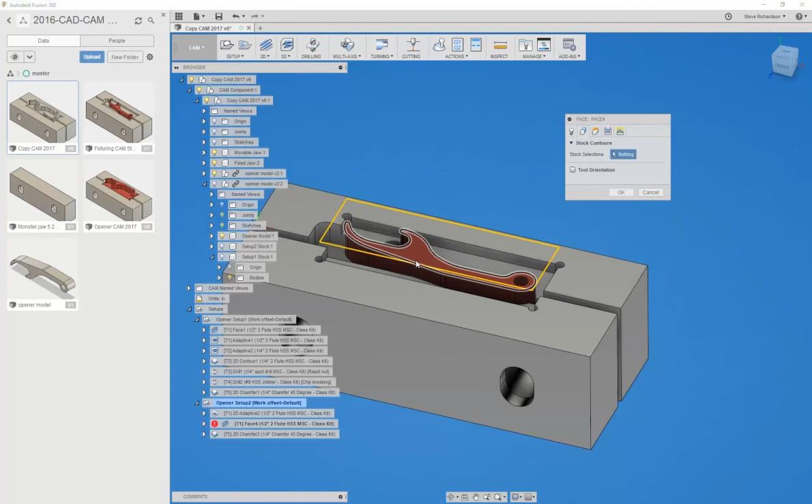Then come back in, and we're going to do facing to get rid of the remaining material. This will be a little bit more clear when I run the simulator. Same feeds and speeds. The geometry, nothing is selected. We're basically just facing it down to the top of the model. I do multiple depth passes just because it's a reasonably thick chunk. I think it's 150 thou. So I told it to do no more than 70 thou step downs. So it just breaks that up into a number of different steps.

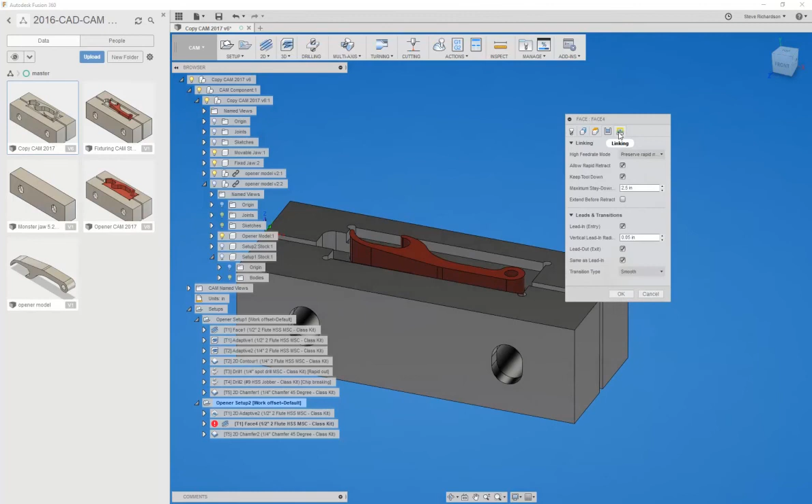And if we look at that, that's what it's generating as a toolpath. So the first adaptive clear is going to get rid of most of that. Then this is going to come in and just do facing, and it looks like it took 3 passes to do the facing. We're going to finish off setup 2 with a chamfer. This is just like in the first setup. I'm going to use tool 5. These parameters for speeds and feeds. The geometry is just this top contour plus the hole. The heights are default. We're going to also do 20 thou and 20 thou for the width and offset.

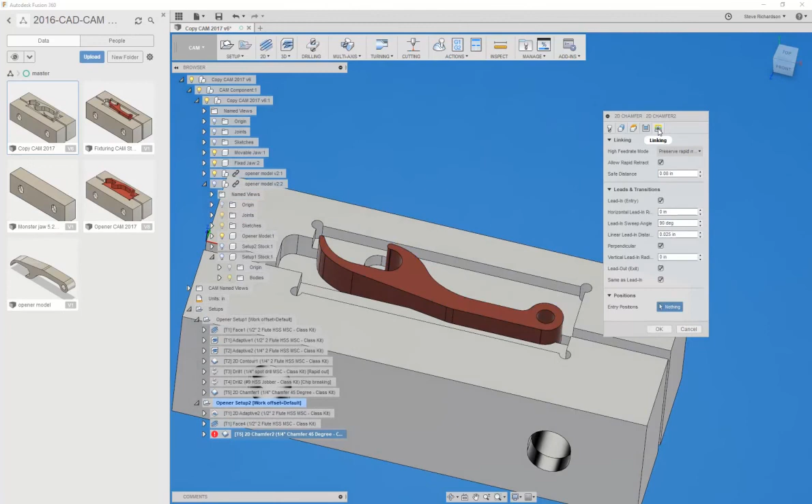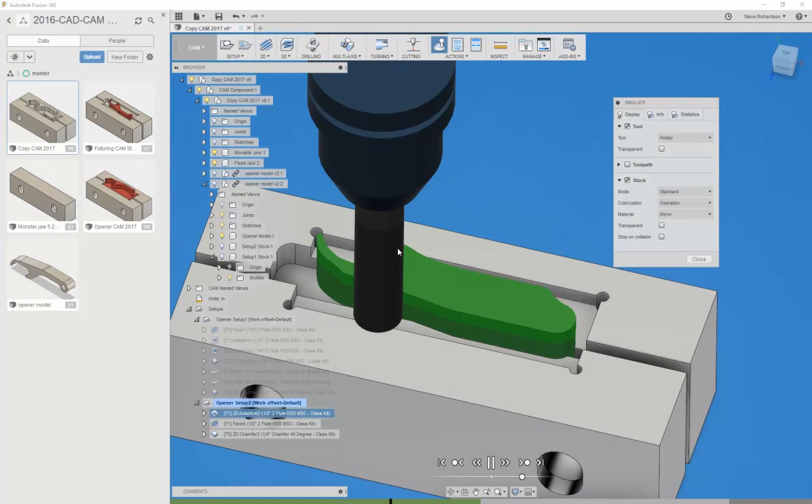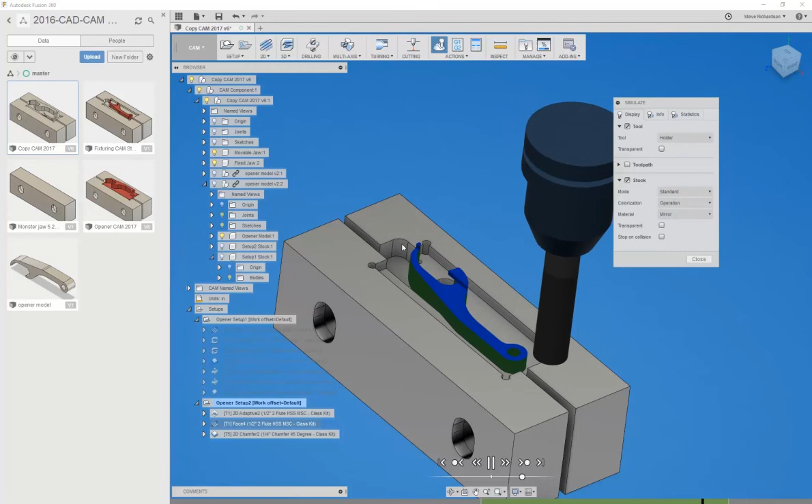And we will run the simulator just to see what this does. So again, we've got the stock turned on. I'm going to shut the part model off just for clarity and run it. So we see that it's doing this adaptive. It's clearing off most of the overhanging material. Now there's still a little bit of overhanging material kind of in this area, but it turns out it doesn't really matter. And now it's doing the facing. First pass. Second pass is a bit more aggressive. Finishing pass. Now it's chamfering. And we're done. And there's our bottle opener.

All right. Hope that gives you guys a pretty good overview of all the things you need to do to get the class project in shape. We will be looking at that as you come in pairs to run your project, and making sure that everything seems to be set to go. We'll basically be going through both of your CAMs at the same time and just having a discussion, and we'll all double and triple check to make sure everything looks good. Then we're going to post-process that code and load it over onto the machine, and you're going to run it.